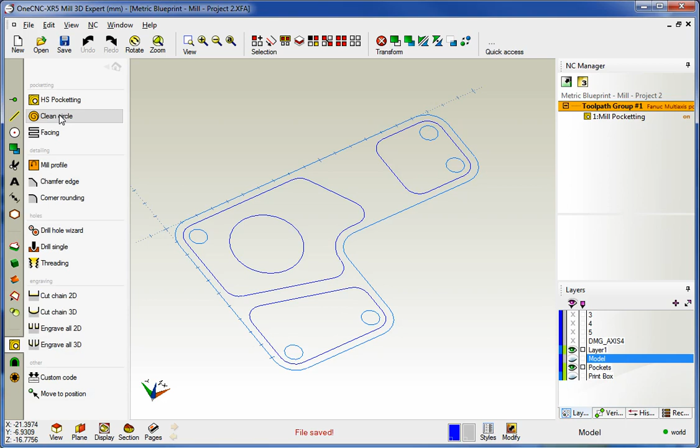But now instead of HS pocketing like we selected previously, we're going to go with clean circle. Once we do this, our cursor changes to a little square, so it's looking for circular shapes. I'm just going to left-hand mouse click that, and when we're done, we'll right-hand mouse click. And again, we get the same select tool dialog box.

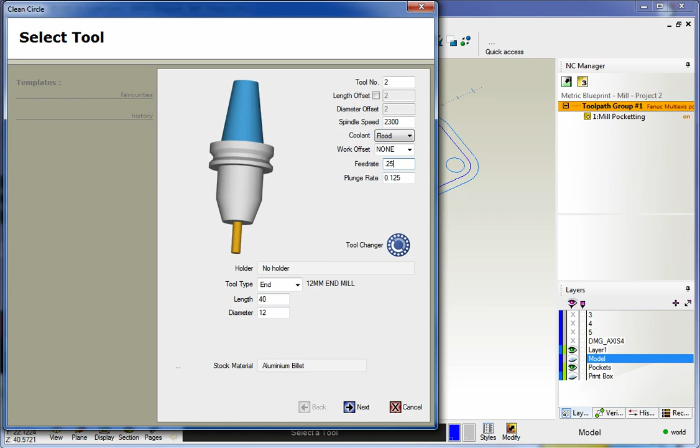This works exactly like all the other previous machining operations in that you can pick a tool from the library or define a tool. For a diameter on this, why don't we go with 12? That looks good, and we'll say this is going to be in turret position number 2. I'm not too worried about speeds and feeds right now, so I'll just type in anything. Let's go with 2300 on that. I'll select my coolant, and for our feed rate, we'll go with 0.25. All this looks good, so we'll click next.

Again, the exact same type of dialog box. You've got your clearances. The rapid move is where the tool is going to rapid. If we had selected multiple circles, this is the rapid approach for each one of those circles. The plunge clearance is where it's going to start to feed down. I'm probably going to change this to 10 and make this something like 3.

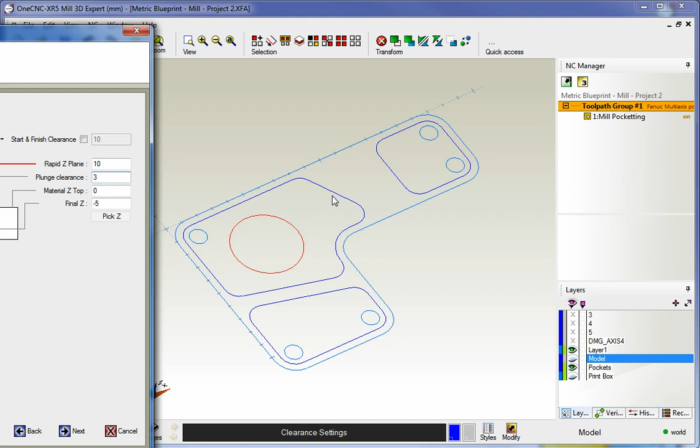The top of the material, this is really important. Now remember, we've already machined these 3 pockets out. In fact, we machined each to minus 15 millimeters. So for material top, we want to put in minus 15 because these pockets are minus 15 millimeters deep. If I leave this set to 0, OneCNC is going to think there's material all the way up at the top at Z0, and it's going to feed all the way down there. So that's why it's important that for this example, for material top, we put in minus 15, because that's the depth of the pocket.

And then for the final Z, I'm going to put in minus 25, and then we'll click next.

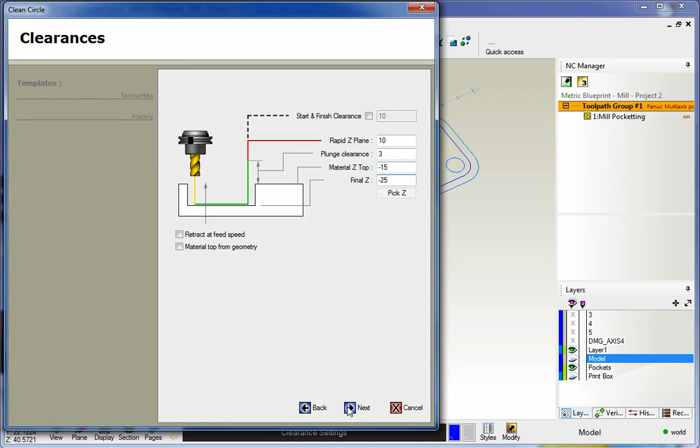Okay, now this is how we can approach the pocket, how we enter inside. You can plunge, you can helical, which I'm going to use, or you can also perform a zigzag. I'm going to go with helical, and I already have my ramp angle set to 10. You can conventional cut or climb cut. We're going to climb cut this.

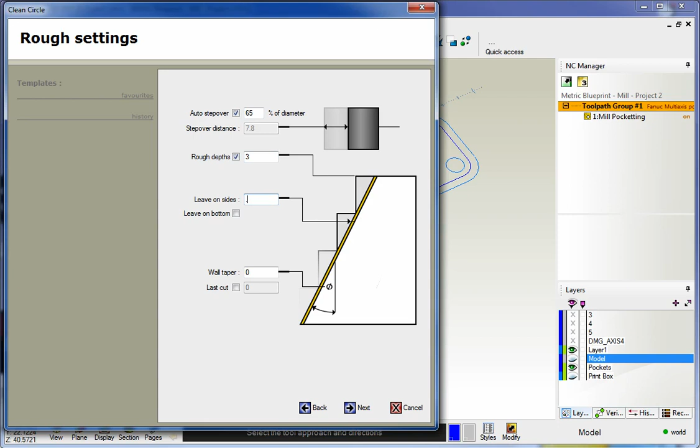Here's your step over. This works exactly like the previous video when we demonstrated the HS pocketing. I'm going to change this to 65%. This is your step over in X and Y. For rough depths on this, let's go ahead and do that. Why don't I put in 3 for that? And for leave on sides, I'm going to leave how about 0.25? That looks fine, we'll click next.

Now in our last video when we were demonstrating the HS pocketing, we didn't use this. This finish settings is if you want to apply an extra finish pass after the initial roughing of the pocket is done. This uses the exact same tool that you have. What I'm going to do is tell OneCNC to make a finish pass at the very bottom of the pocket. You have other choices — you could make a finish pass at each depth of cut, or come up with a custom depth. But I'm going to say just make a finish pass at the bottom, and that's going to remove this 0.25 millimeter when it makes its finish pass.

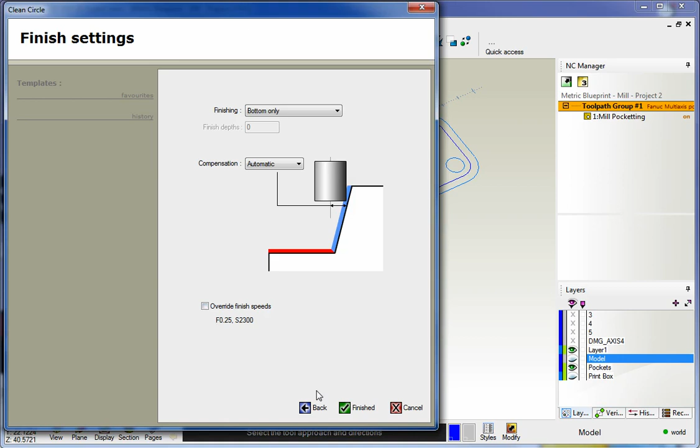There's our circular pocket operation. And if we turn our solid model back on, that looks good. Why don't we just preview that pocket operation? So we'll right-hand mouse click, go to preview toolpaths, and there you go.

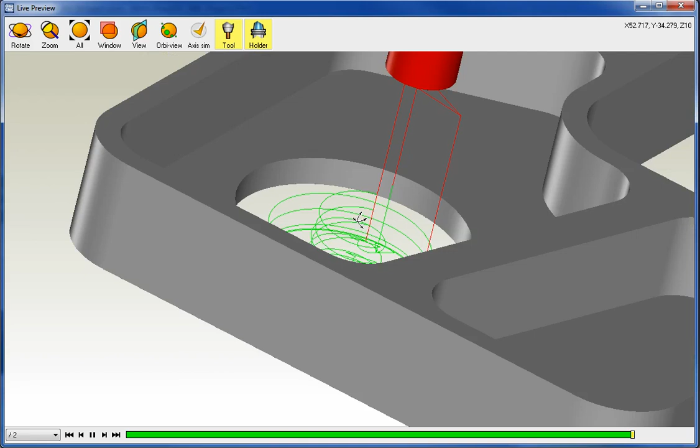You can see that we're feeding. We're starting the feed just right above the floor of the pocket and machining all the way down through the part. All right, thank you so much for watching, and I look forward to seeing you in the next video.